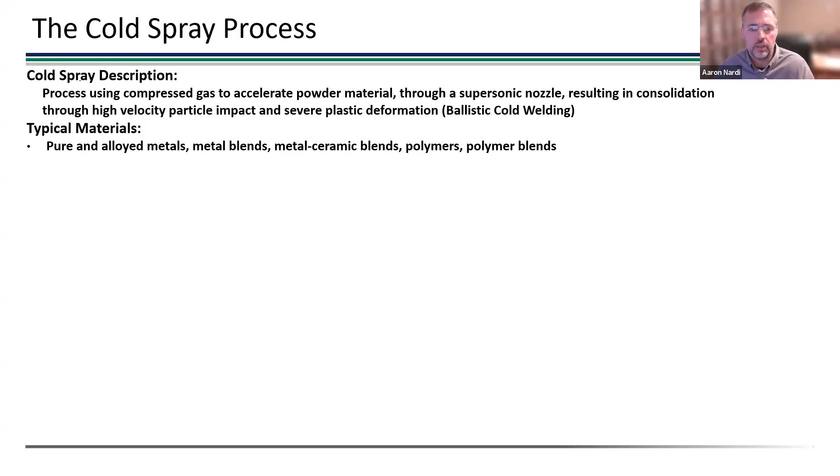Anything that can deform plastically can be cold sprayed. That's a differentiator from other thermal spray processes that deposit ceramics and similar materials, which is much more difficult to do with the cold spray process.

The systems typically consist of a control system, usually a gas heater—because we say cold, but what we mean is less than the melting point of the material. We have to feed the powder somehow, then mix the powder with the gas, and then it goes through the nozzle. When you do it right, you get a nice dense deposit.

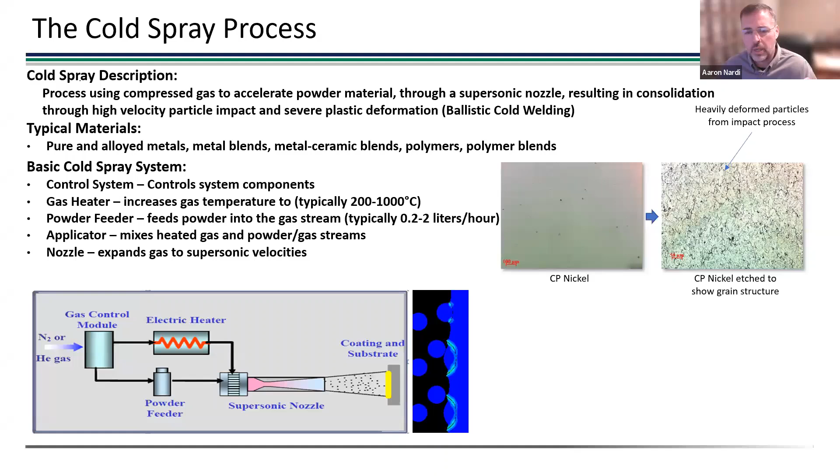This is an example of a nickel deposit. When you etch that, you can see the grain and powder structure in the material. It's very heavily deformed, with high levels of cold work. That's really how this process is differentiated from all the other thermal spray processes—it's the solid state nature of the process.

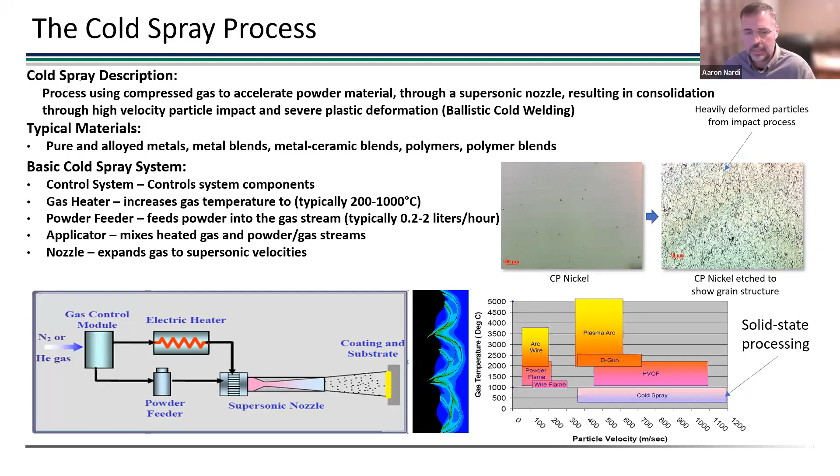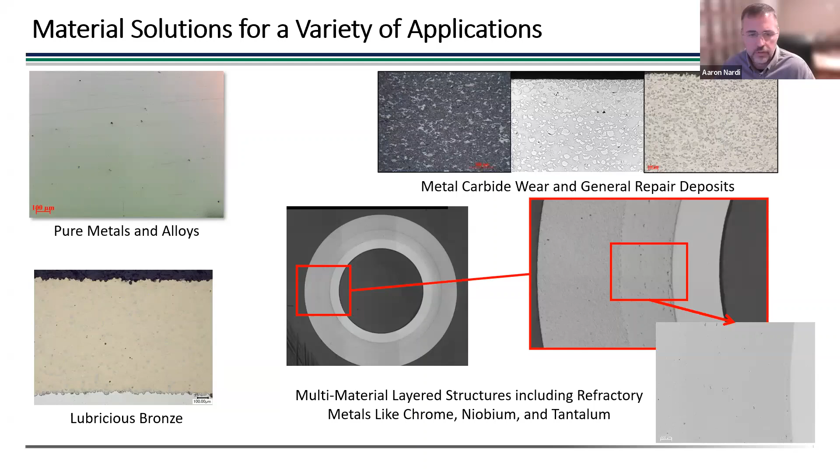There's a wide variety of materials you can process—metals and alloys, and blends. Metal carbide blends are really popular, especially for wear applications. Bronzes with wear phases or lubricious phases are also used. You can create all kinds of structures because you don't have to worry so much about melting and metallurgical incompatibilities. So you can put layered structures together that can be very complex. This is an example of a three-layer refractory material.

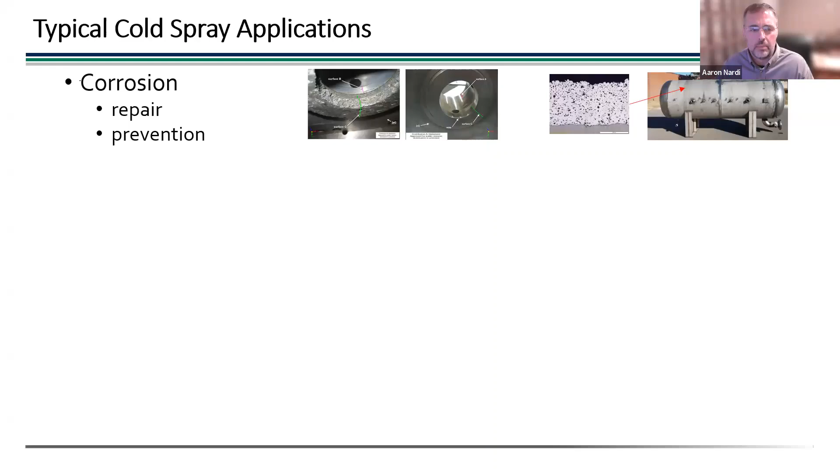So where do we use cold spray for corrosion? The industry is dominated by repair and prevention of corrosion, as well as repair and prevention of wear—those are the two dominant areas across a wide swath of the industry. However, there's also a lot of work done in other surface enhancements, whether thermal, inductive, conductivity, or even antimicrobial.

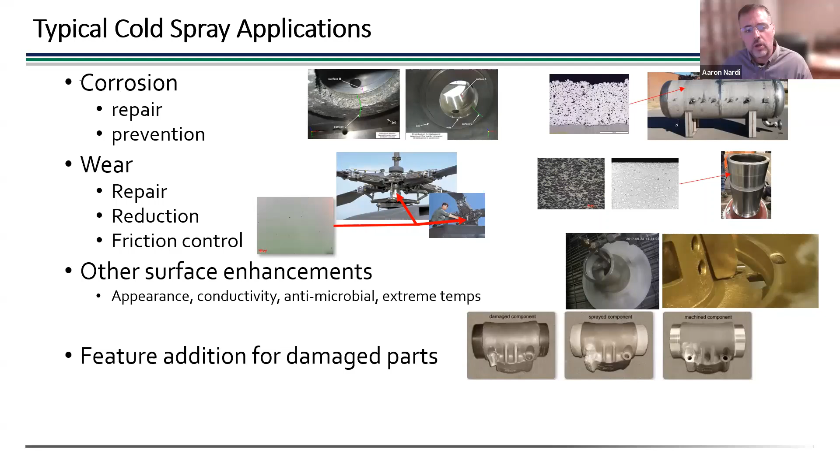When we're getting into these additive pieces, there are two ways we look at it. One is creation of very complex shapes on complex mandrels, which is a very good use of cold spray because it's excellent at putting down thin layers and building those layers to create a deposit. You can also use it just like a 3D printer and print on a flat plate, which is being done very widely today as well.

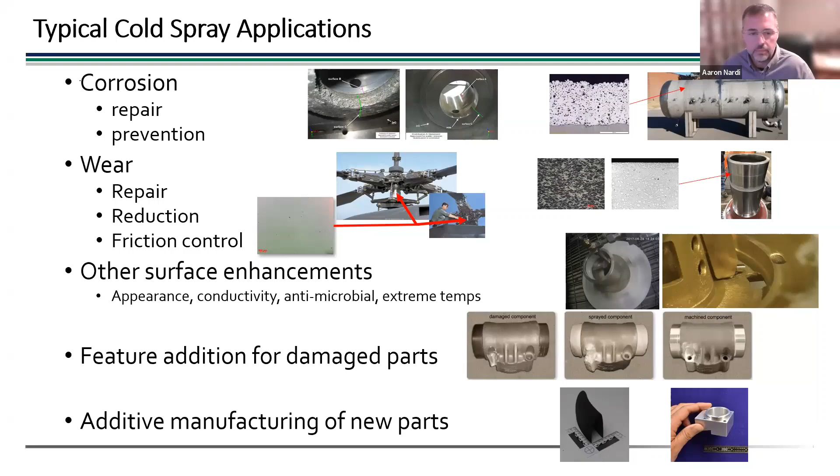VRC—kind of where we fit into things. We started as a company focused on high pressure cold spray. The idea was to take high pressure cold spray capability that already existed and scale it to put it into the hands of an operator. So we wanted hand-operated high pressure cold spray, and also something that could be portable. That's where the company started.

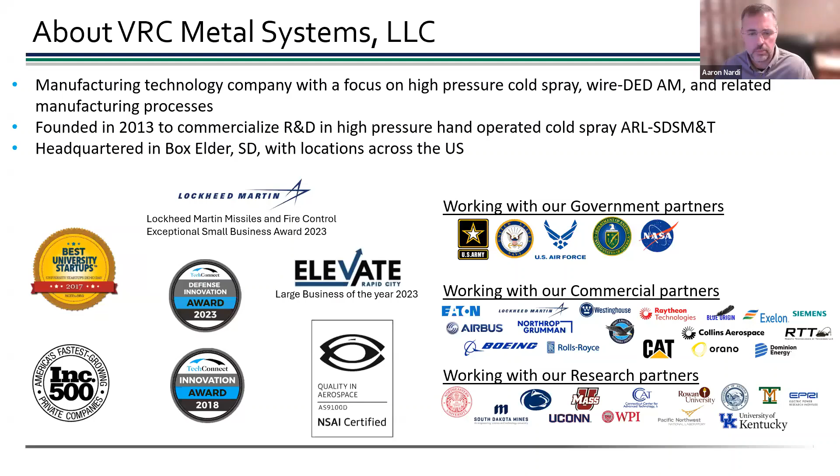Today we do almost every range of cold spray application, from factory use systems to very highly portable systems. We go into the field with systems, and we also do work in shop environments. We've received a lot of awards across multiple communities and different business sizes, and we work with a variety of customers across commercial, research, and government sectors.

If we look at the cold spray market as a whole, we can break it down into a few different segments. These are the areas we operate in—system engineering and manufacturing, which is fairly straightforward. But in order to use a cold spray system, you have to have a lot of other stuff—you need gases, and you need to be able to collect overspray dust in most places anyway.

So you need some sort of sound enclosure, or you need a lot of PPE on the operators to manage sound and things of that sort. So we do integration of our systems with automation and all of these booth configurations.

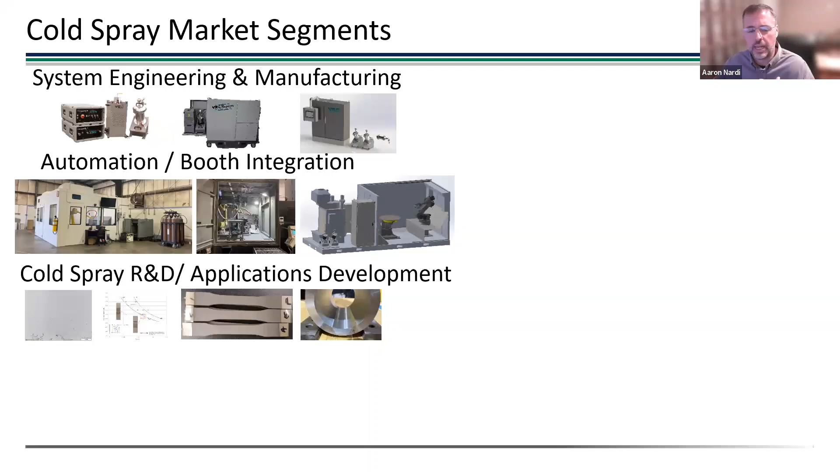We also do a lot of R&D and applications development for customers. This is where we're trying to develop specific materials or trying to deposit. You see an example there of titanium being put onto polymer substrates.

So unique applications that haven't been done already, we do those kind of developments for customers too. And then, of course, we sell consumables. So all of this is kind of, I would say, the system side - getting the customer what they need for doing their own cold spray work.

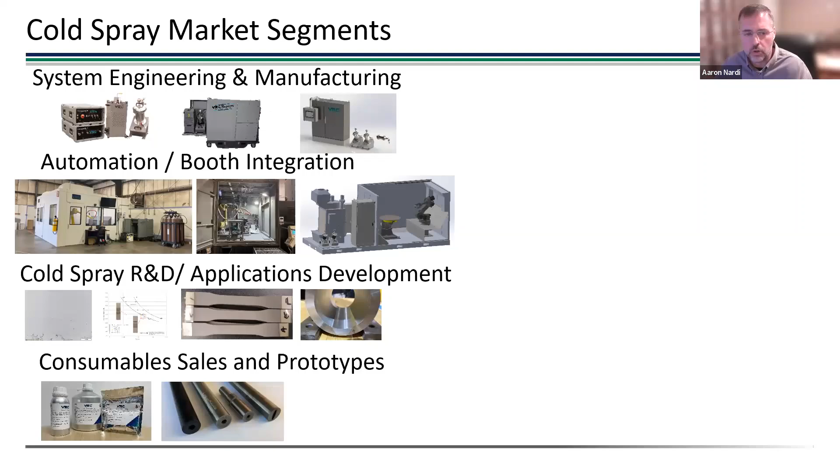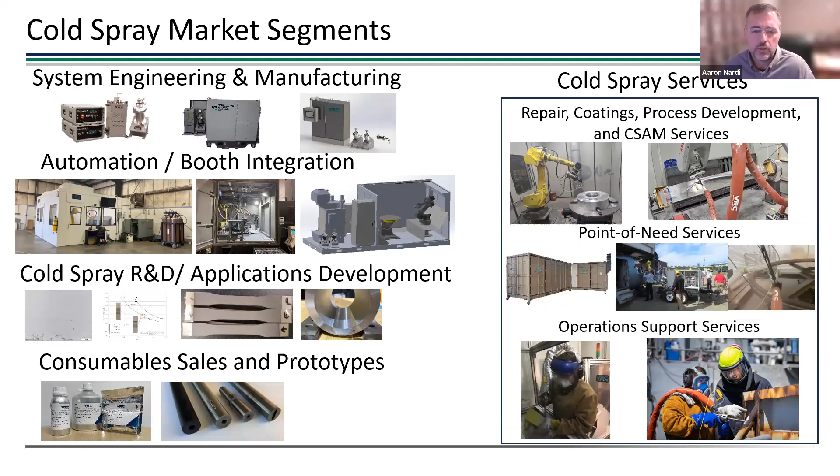We also, though, have a whole services side, and I'll talk a little more about this today. The repair services and coating services, as well as point of need services. So if we want to take that process to the field and actually repair really large parts that maybe can't be moved or something like that. And then we also work on operations support - I'll talk a little about that.

But first, let me just explain a couple differences in our pieces of equipment. So everything we do is high pressure. It's all high pressure cold spray. So you get that good high velocity, good density, and so forth. But we do put it in different packages.

So this package is a very highly portable system. It's meant to be able to go into the hatch of a submarine or some other kind of tight area. You can bring all of the components in by hand. And again, it does the full high temperature and high pressure and temperature application.

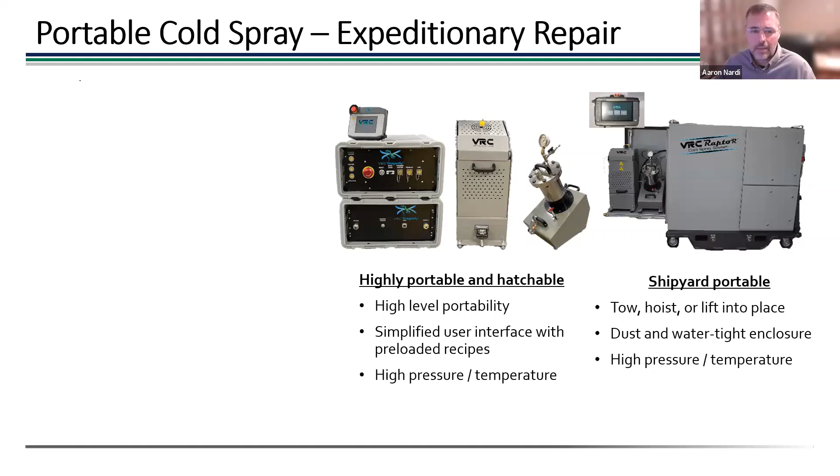Now we have our VRC Raptor - so that was the Dragonfly, this is the Raptor. We call it a shipyard portable system, but it's really meant to be either in a factory or in a shipyard where it needs to be rolled around from maybe one location to another. It does have hoist points on the top, and it's got a tow bar so you can tow it around with a vehicle. So it's a portable system, but it's not a hand portable system - it's to be carted around.

And again, both of these can be hand operated or robotically operated. They both have a similar temperature and pressure capability.

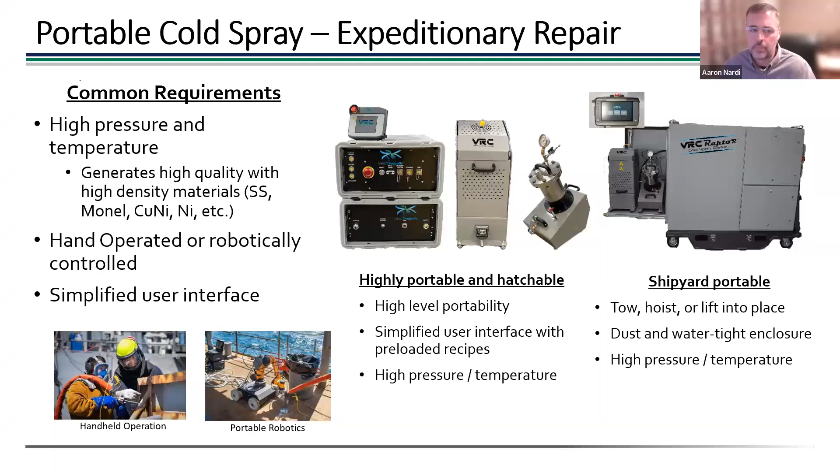Now we have our factory style system. I said the Raptor is often used in a factory setting, but this is really the system that's meant for factory use - it's called our Gen 4. This has a little higher temperature capability, also with very high pressure capability. And that gets us even higher velocities, which gets you increased plastic deformation, which, if you go back to what I said before, is really the key to cold spray.

So now we can deposit a variety of materials with very high quality - super alloys and carbides and all kinds of blends of material.

The difference also with this system is that you have water cooling on the nozzle, which does allow you to do a couple of materials that otherwise you couldn't do without fouling the nozzle. And then we also have 2 powder feeders standard with this system, so that means you can put one powder in one feeder and another powder in the other, and then blend the two of them together. Now if you want 3 or 4 powders blended together, we can go up to 4 powder feeders in our standard unit, and we can customize to go more than that as well.

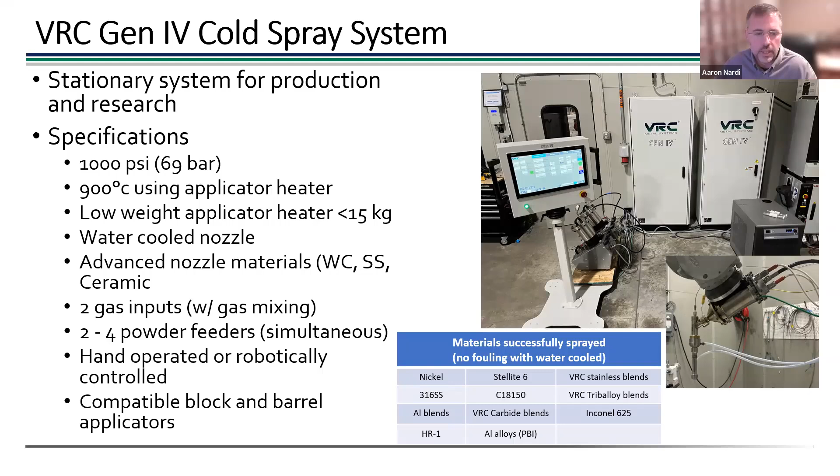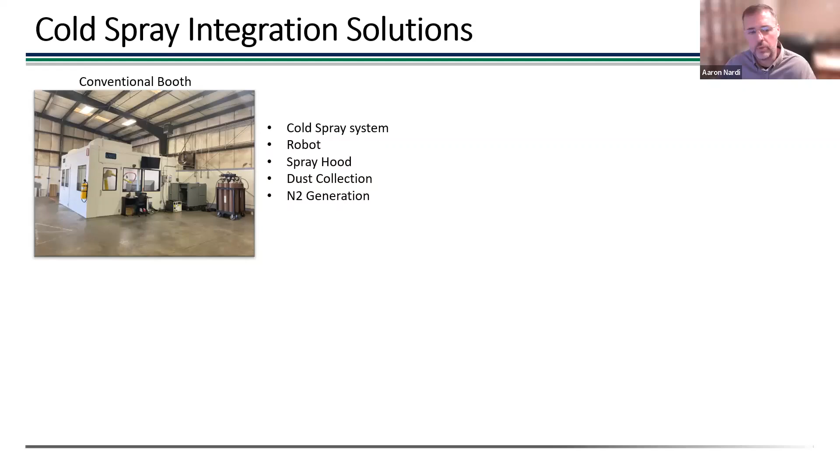All right, so typically integration solutions include, again, something like a spray booth for your sound enclosure, your robot, maybe a turntable. You need some kind of a spray hood with dust collection. And we also very commonly use nitrogen generation, and we kind of integrate all of these different systems into a facility.

Now, if you want to take it a step further, you can have all of that, but also add on things like machining capability that's coupled to your cold spray booth, or you can add in helium recovery if you are going to be doing a lot of helium work. So, I mean, those are all options as well that can be pulled into a manufacturing cell.

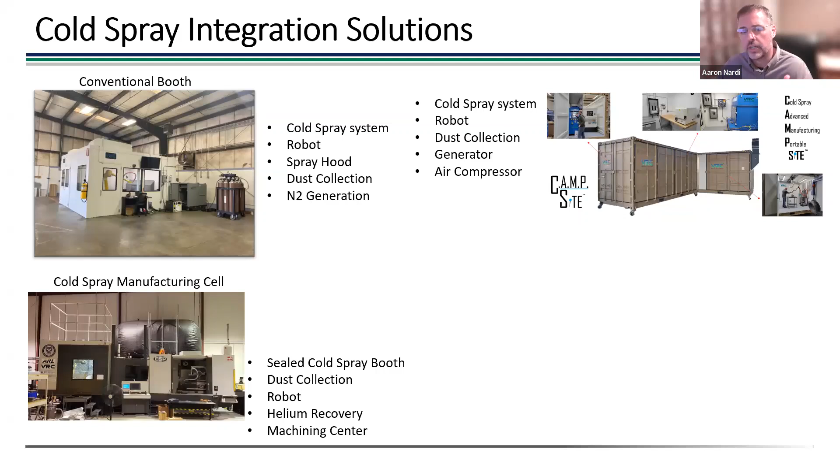And then you've got your portable solution. So if you want to integrate a portable solution for a desert environment or a shipyard, for instance, and you want a full capability booth and system but don't have a building to put it in, you can take something like this. It's a fully enclosed spray booth with its own generator and gas supply. It's got operator space, heating, and air conditioning for the operators. So you can put this at any facility or location and have a full cold spray capability at your fingertips.

Similar, but in a different form factor, we've got trailer-based systems. Same capability, but now put onto a trailer you can wheel around to a job site. You can pull a cart off that has your robot on it and bring that cart over to wherever you're doing your work.

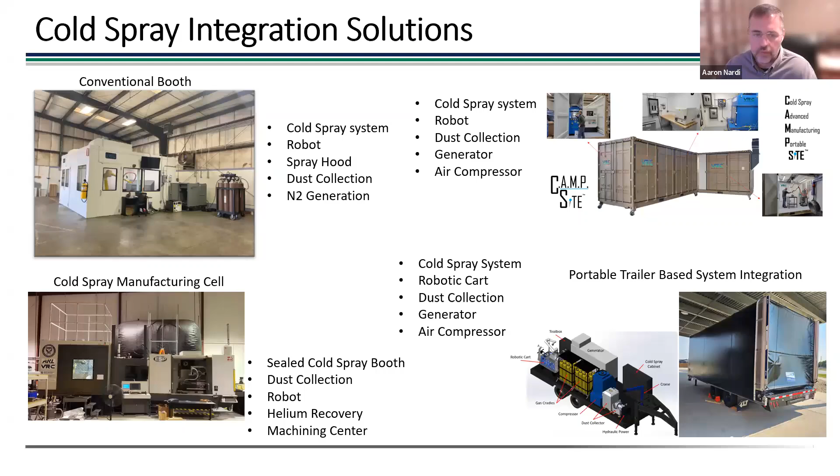So with that, that's kind of our equipment side - equipment integration and so forth. The bulk of that work is done at our headquarters facility in Box Elder, South Dakota, where we have systems engineering, systems production, and some process development and limited production.

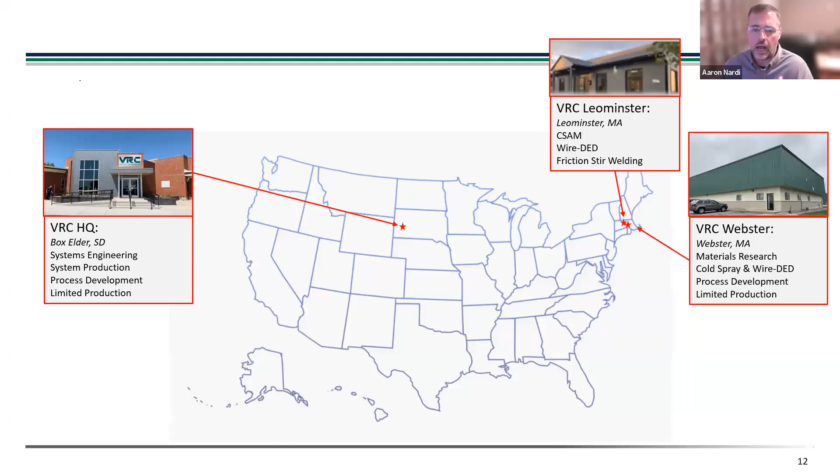We have two facilities close to Worcester where CSAT's going to be - one with Solvus at their Leominster facility, and the other in Webster, Massachusetts. Here we do material research and process research. We do a lot of government work on programs developing cold spray capability and also wire DED capability, and we do some limited production out of those facilities.

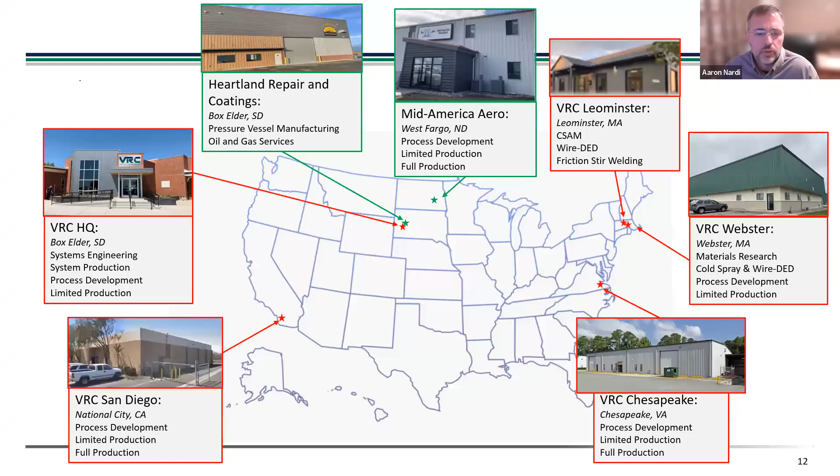We have full production facilities in both Chesapeake, Virginia, and San Diego - I'll talk a bit more about those. And then we have two subsidiaries who also do cold spray in a production environment: Mid-America Aerotech and Heartland Repair and Coatings. I'll talk a little about them as well.

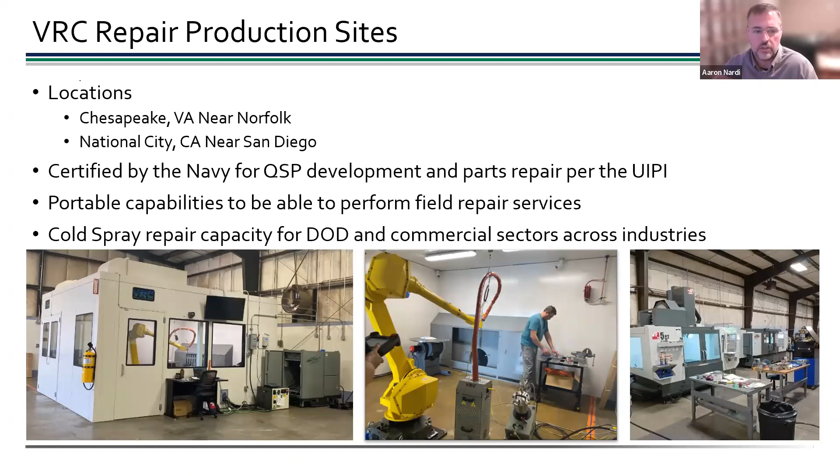First, the production facilities in San Diego and Virginia - both facilities are certified to do qualified spray procedure development for the Navy, so they're primarily focused on Navy activities. However, they also do a lot of work for other DoD and commercial sector industries. They have a lot of capability: full spray booth, qualification lab, machining capability, mills and lathes, and so forth. They also have equipment that can be taken portable to do field services locally, so we can lead off those facilities and do in-the-field repairs.

Mid-America Aerotech, this is in North Dakota. They have a full service MRO capability, so they do everything from machining and inspection to testing of all kinds - hydraulic, pneumatic, and so forth. But uniquely, they also do a lot of cold spray development and implement cold spray repairs into their MRO process. They're also doing work with electrospark deposition in service of their MRO clients, and they have full certifications to do FAA work and repairs in Europe as well.

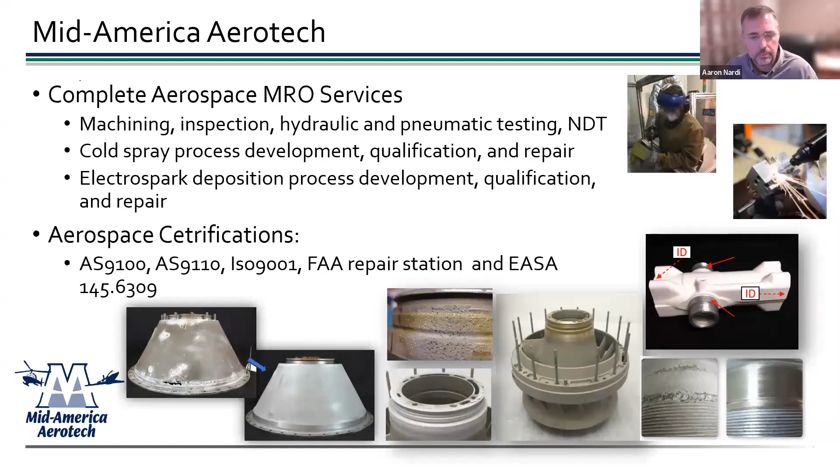Now, Heartland Repair and Coatings - they do a little different work, focusing more on the oil and gas sector and some heavy industrial sector. They do a lot of work with pressure vessel fabrication, structural fabrication of skids and pipe stands, and custom process piping for installations. Where cold spray fits in is they've developed a patented process for repairing gas and oil pipelines that have been eroded and worn over the years - they can go back in and add cold spray material to fill in the wear, then apply a composite wrap to certify that pipeline. They also do work with other pipe and vessel coatings for corrosion, wear, and so forth.

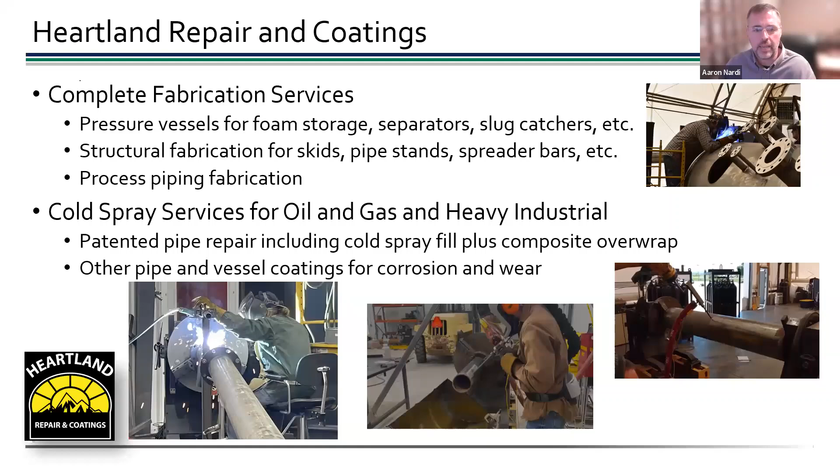So you've seen there's a lot of production capacity and capability, but there's still a lot of reasons why we might need to bring capability into your own four walls. One thing I like to stress is that cold spray is really easy to do - it's difficult to do well, though. For those of us who have been in the industry a while, things can pop up, and you learn a lot about masking, robotics, and all the extra things around cold spray that make it much more complicated to get it just right.

So to help people out, we do a lot of support training. We do a variety of different training, whether it be an extended period, like maybe 2-3 weeks or so. But we also do things like staggering the training - we'll come out and do the initial training, then go away and let the folks work with the equipment and work out some problems, then come back and do more training. That's helped quite a bit in getting people up to speed on how to use the systems and equipment.

Also very important to do calibrations regularly. We have an annual calibration schedule we work out with most of our customers to try to certify all the sensors that are in the system and verify that everything is running the way it should be.

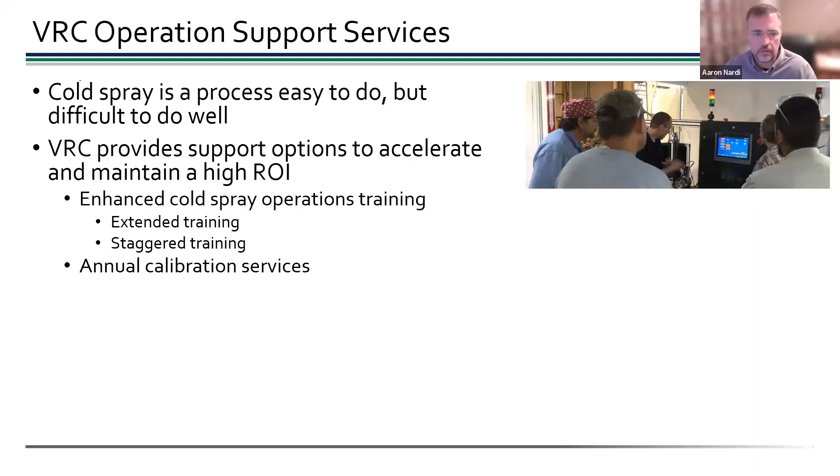You can go a step further, and we have a full PM of systems. So we'll actually go out on a periodic basis, usually once a quarter or something like that, and do full PM on the systems, replacing anything that needs to be replaced and so forth.

And with that, we also give reach back application support. So this is where a customer has a problem, they've identified an application or a potential application, but they just don't know the right material or the right way to develop the masking or whatever, and we'll work with them and develop that application with them so they can go and generate that ROI that they're looking for. Access to prototype hardware and so forth is a big benefit with that as well.

And then kind of at the full extreme end, we also put people on site at customers' facilities. So you get all of that PM application support, and you also get a person on site every day working hand in glove with the folks at the facility to develop those applications.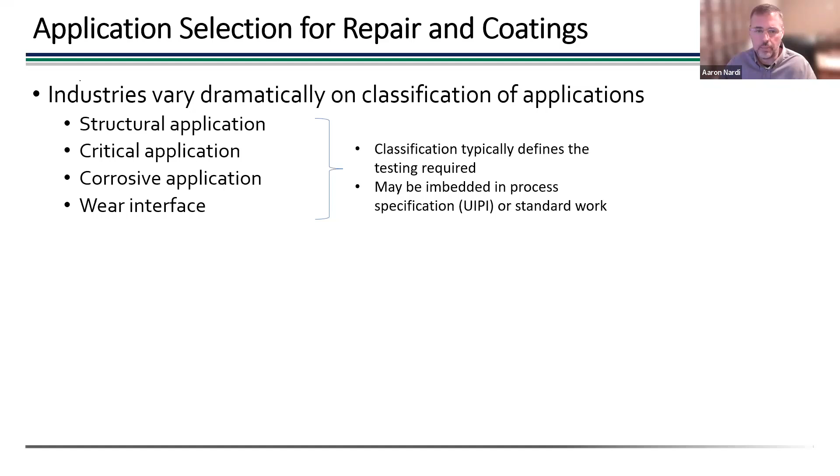And this classification typically defines what kind of testing is required. A lot of times that's embedded in some sort of a process specification. So if it's a commercial industry, it could be a material spec or a process spec that they have internally. The Navy uses something called the UIPI. I'll talk a little bit about that, or so forth.

Now we get to the material selection piece of it, and there's a lot of factors that might go into that material selection - mechanical requirements, physical requirements, and so forth. But also down the list sometimes is material cost. It does become pretty important, you'll see in some applications, or even just customer preference. Some customers are used to certain alloys, certain systems, and they want to use those for their repair.

Now, as you go through the qualification process, I'll talk a little bit more about that, but there's necessarily a lot of testing that gets done when you're qualifying an application. And one thing that's important to consider when you're setting up specifications and process plans and so forth is having a mechanism that allows for altered processes. So there's not many places that do this, but having a primary path for qualifying and a primary group of tests that need to get done to qualify an application, but then some subset of testing for requalification if you want to change something small.

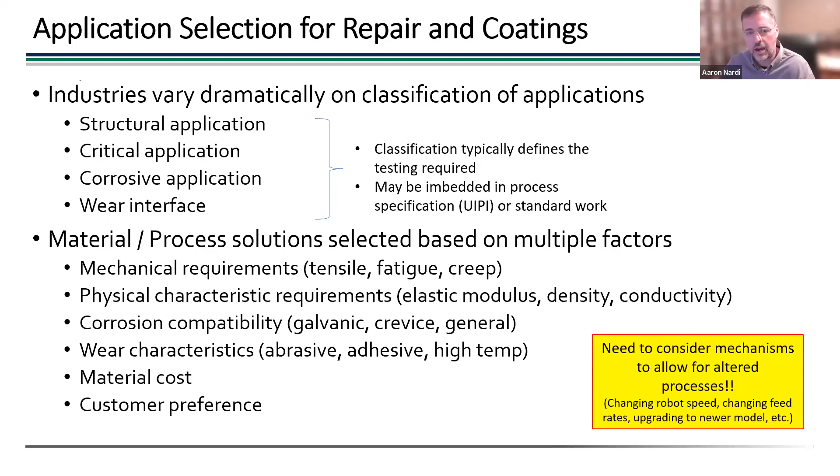Like say you decide I'm going to go from this geometry to this geometry. Now I got to change my robot speed. Well, all of a sudden, if your process was qualified with 200 millimeters per second and you want to go to 100, now you got to requalify everything. That gets to be very difficult. And changing feed rates is another one, and I'll show you an example of that. Or even upgrading to a new model of system, right? A new cold spray system or something like that. How do you prove that what you're doing here is the same as what you're doing there without going through a full requalification?

All right, so a lot of times what we talk about when we're trying to select an application is, especially if you're new to cold spray, where's the low-hanging fruit? What is that thing that's going to be easy to get, easy to implement, easy to qualify, and also give me a big ROI? Well, one of the first areas that people look at is high cost parts.

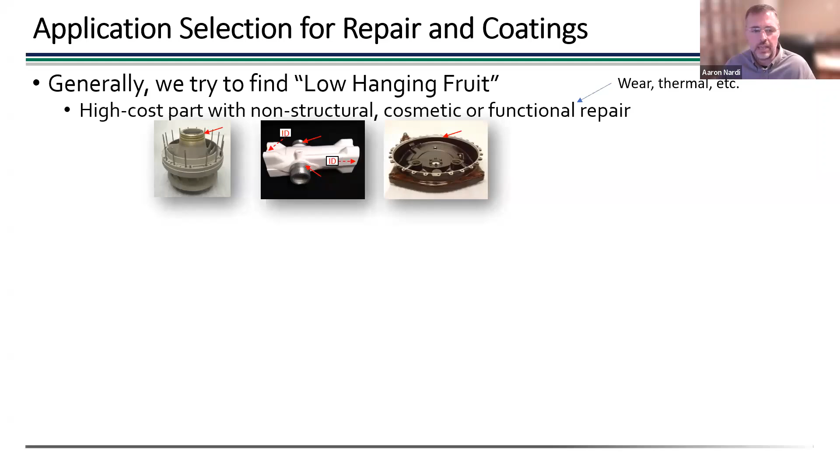And this, I'm showing aerospace examples, but this could be any industry. High cost parts that are non-structural, cosmetic, or maybe functional. Maybe they have a wear aspect to them, or they're a sealing surface or something like that. These are typically what people look at as lower hanging fruit because they may not have as many testing requirements.

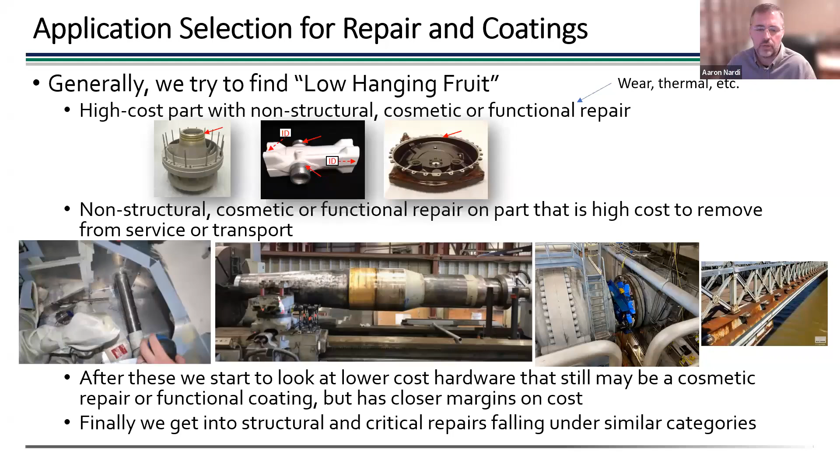So if you have something you can't move, how do you repair it without completely cutting it out and replacing it? After this, we start to get into costs and what kind of cost benefit you get out of a particular application, and then finally structural applications. This is the most difficult application typically because it requires a lot of testing.

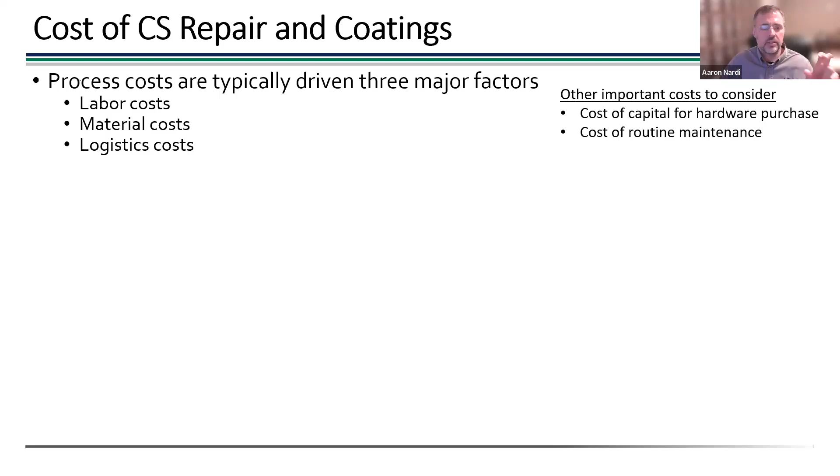So let's talk about cost for a second. If we look at your basic cold spray process, we can break down the major costs into three categories: labor, materials, and logistics. There are other important factors like capital cost and routine maintenance, but the bulk of the costs on a part-by-part basis fall into those first three categories.

Focusing on labor costs for a minute: how many parts are you doing at once? A 1-part lot versus a 10-part lot versus a 100-part lot—there's a big difference in your setup costs, fixturing costs, and so on. Is the geometry simple? Is there a lot of automation? What's the masking like? Are you repairing it at the point of need, or in a factory? All these things play a role in labor costs.

Material costs come down to the actual cost of the material, the deposition efficiency of the material, and how big the area is that you're repairing. Then there's the gas—if you're doing helium, that's obviously an important factor, nitrogen a little less so. And then there's logistics costs: shipping parts, shipping people to the parts, all that kind of stuff.

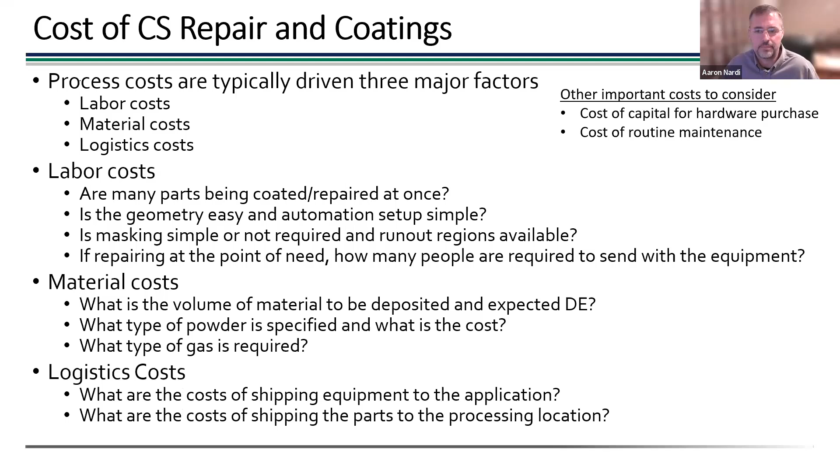So let's look at a simple case study. If we take a high value magnesium part—say it's got a surface 24 inches in diameter, about half an inch in height, and we want to put 50 thousandths of an inch of material down. Let's say this part costs $100,000. I've got the cost of helium, nitrogen, a helium sprayed aluminum powder, a nitrogen sprayed aluminum powder, and the relative deposition efficiencies of each. All those assumptions are here.

So we start to look at what the most basic cost would be—I'm not even getting into profit margins or anything like that, this is just your base cost, so your real costs are even higher than this. But if we just look at that base cost, you've got about $4,000 to repair this part, using pretty typical numbers for a helium sprayed version—a standard helium process of 6061 spraying 6061. That's still only 4% of the cost of the part, so it's still a big value to the customer, but it is $4,000 to repair that part.

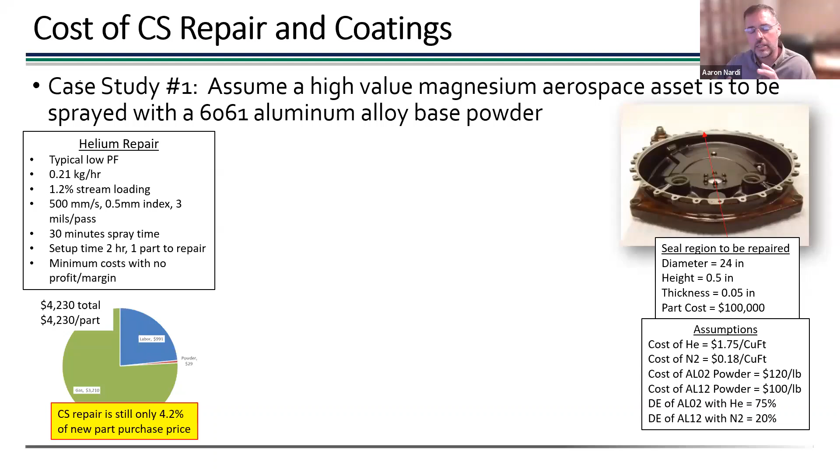If you did some modifications to that process—and this is where it becomes important to have that mechanism to change your process around—you can increase your feed rate and increase your velocity so that you still get the same thickness per pass. Now you're getting down to about 6 minutes of spray time instead of 30 minutes.

And all of a sudden your per-part cost goes down to $700, $800, right? But that also includes more parts in a lot. I assumed a 10-part lot here as opposed to a 1-part lot for the first case.

So basically increasing the powder feed rate and then increasing the number of parts you spray gets you to this significantly lower cost. Now you can go a step further and go to nitrogen, but now your increment is much smaller, right? You're going from $800 to $400. It's still an improvement, and it could be very important, especially if there's difficult logistics in getting helium.

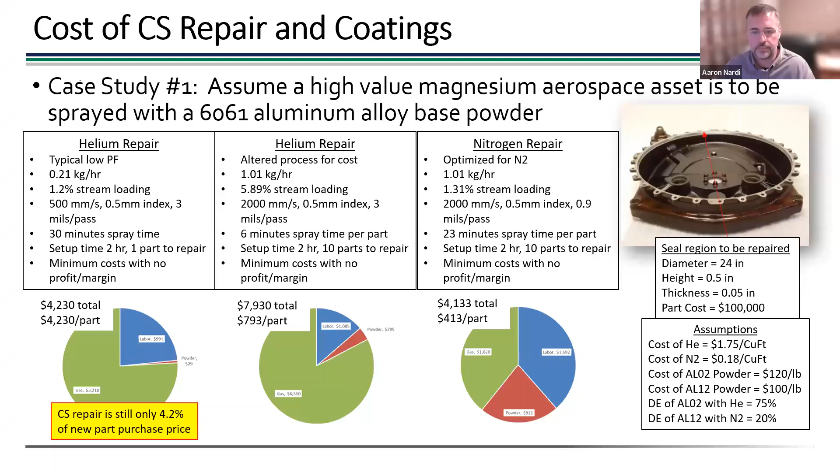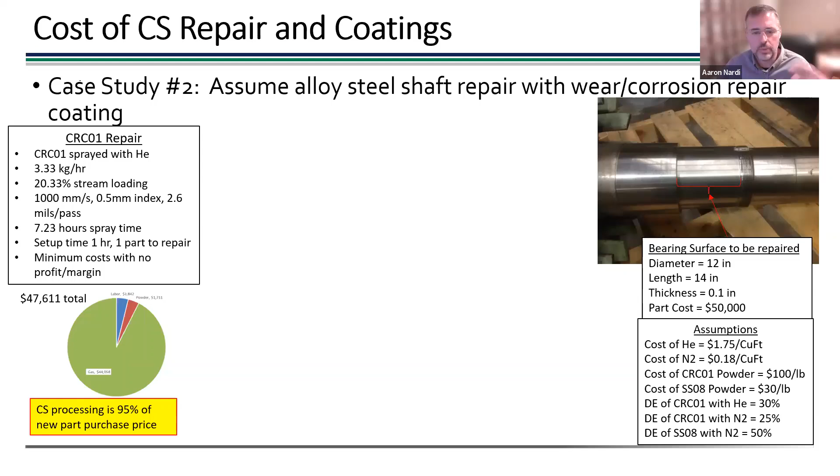Now, if you start to look at a helium repair with this material, this is CRC01, a chrome carbide nickel material used very commonly to repair steel parts like this. Even with a pretty high stream loading, not incredibly high but pretty high, it's still going to take 7 hours to put that material down. So your cost of doing this job with helium would almost be as much as the whole part cost. So you really can't do that.

But if you now switch over to nitrogen, even assuming only one part here, still one part lot, you bring that total cost down to about 12,000, and now you see the large bulk of that cost is in your powder. The green is your gas, the red is your powder, the blue is your labor. You can see the bulk of it is now the powder.

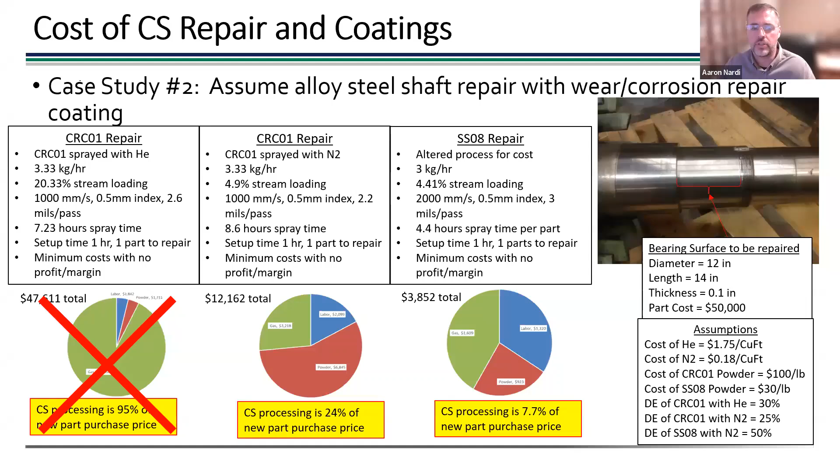If you go a step further and select a powder that's a lower cost material, now you can bring that cost down even further to just under $4,000. And now you've got an even distribution of your gas, labor, and powder costs. So that's really just a couple examples of how different assumptions and different paths to a solution can make really large differences in the cost of a job.

All right, I'm going to jump over to qualification procedures, and the first one I'm going to focus on is NAVSEA. They've done a really good job of creating this UIPI system, which allows them, at the shipyard level, to qualify their own repairs across platforms. So across the ships they service, they're able to use this UIPI to dictate whether they can do a repair or not and how to qualify that. As long as you stay within the guardrails of what this UIPI allows, you're able to qualify your own repairs locally.

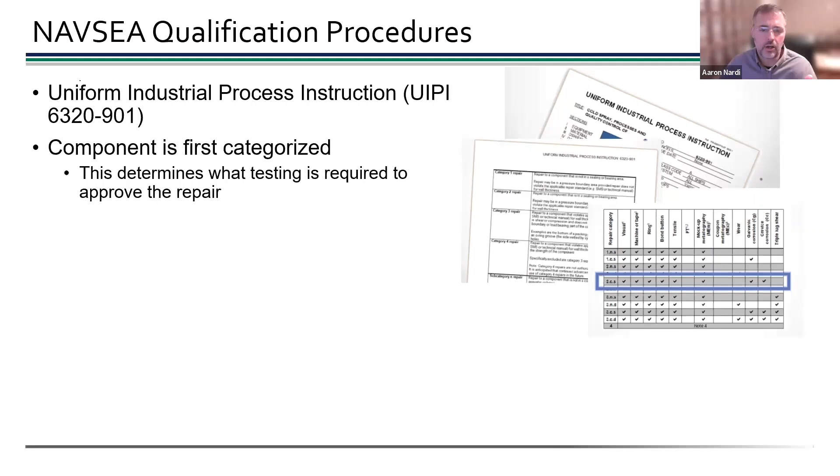This is kind of unique amongst the DoD because it's got that cross-platform capability. So the way this works, like everybody else, you qualify what category of part it is, whether it's structural, wear, corrosion, whatever. You identify the tests you're going to do, you pull up the ASTM standards, and you run it per the standard or per the UIPI itself, depending on the test you're running. Then when you're done, all that data goes back to the shipyard, they sign it off, and this QSP goes into the Appendix A of the UIPI.

It's a pretty straightforward process. We've done it a bunch of times with our repair sites, with our production sites. Works quite well.

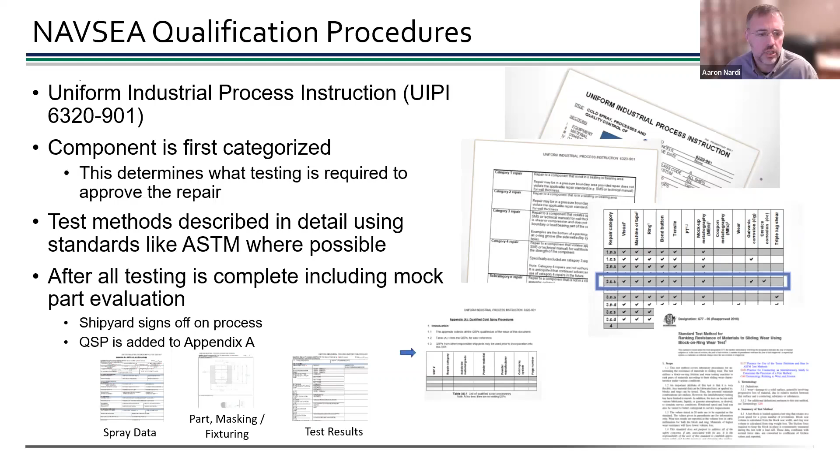They just released recently a tech pub. Now, this is a similar document to the UIPI, but it actually allows a similar application of the technology at the commercial shipyards, as long as they're doing Navy work at those commercial shipyards. So they have this process to allow them to do that there.

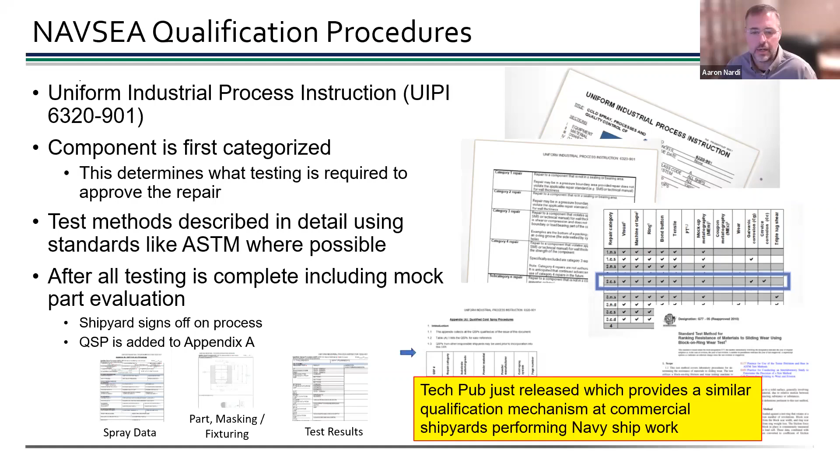Next, I'll just talk quickly about DoD aerospace. Really, a lot of what you're going to see from here on is that every platform and every part needs to be approved, right? Even non-structural, non-critical applications require approval part by part, pretty much across the board, with a few exceptions.

And this includes the program offices as well as airworthiness. They may reside at different locations, but all these folks typically need to sign off on every repair.

The Air Force is a little unique. At the wing level, they actually require every single part, every single not just part number but serial number, to be signed off, because they're also trying to maintain traceability of which parts have been repaired and which haven't. At the depot level, it's a little broader because they have all the paperwork in place there for the repair of the part, so they're allowed to execute that repair on that part number whenever needed.

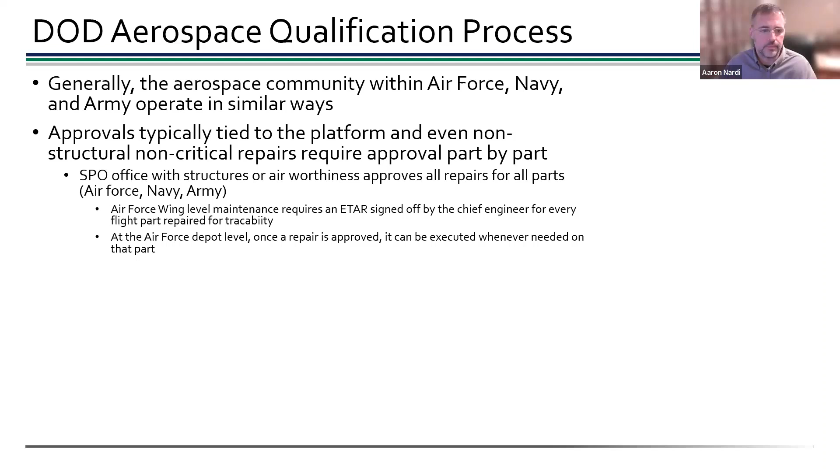At the Army, they have a slight exception as well. They have certain cases where they have blanket approvals for certain categories of parts. So magnesium repair is one of those for non-structural applications, and that got a lot of MEOs issued early on the Army side.

Structural repairs, like I said before, are pretty rare still. There's a few out there, but they require a lot of detailed testing typically, and sometimes full component level testing, and that gets very difficult to do. So there's not as many of those around.

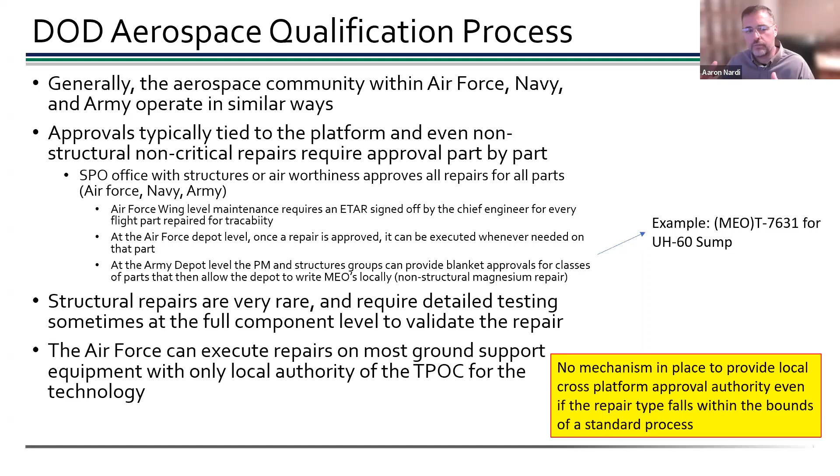Interestingly, the Air Force can execute repairs on any other ground vehicles with just the local TPOC signing off on it. So that's kind of an interesting carve out on the Air Force side. There's really no mechanism in place for cross-platform approval authority, so like the UIPI that the Navy has, there's not really that same mechanism that allows local approval for a category of parts, with that Army exception, of course.

All right, Army ground-based systems. This is really, I don't want to say ad hoc, but it's a little different when you go from one PM to another PM because of the way that different platforms operate. But it is still a part by part and a platform by platform approval. Some PMs really rely more on the OEM to do the approval, and some do more of a local or Army approval for that.

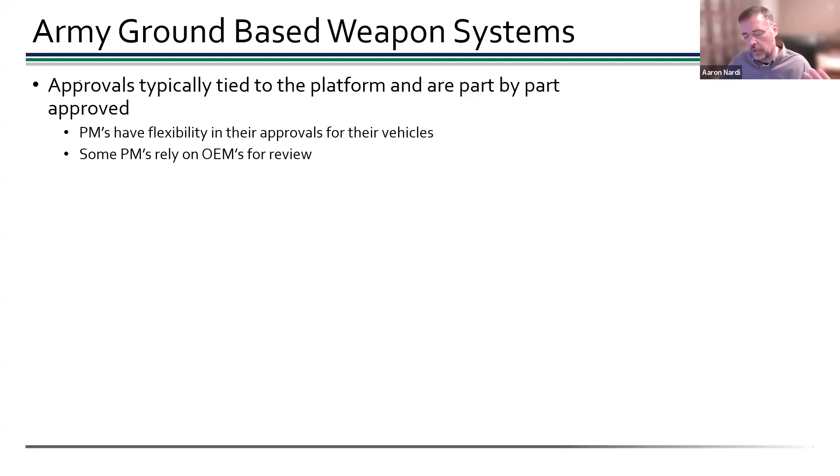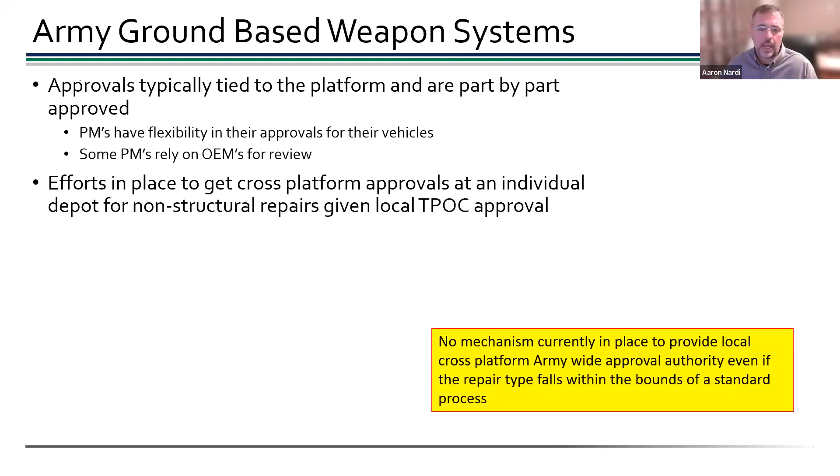And there are some efforts in place to try to get cross-platform approvals, at least at the individual depot level. So a particular depot might be able to get approvals to do a category of repairs. There's not really a mechanism in place, though, still for cross-platform and Army-wide approval authority there.

Now, commercial aerospace, I mean, it's pretty straightforward. They have processes in place. The OEMs have repairs that they implement all the time. They have to go to the FAA or the DoD to get those approved, but those are very robust processes. They do them all the time for a wide variety of repairs. And those approvals are pretty straightforward because the OEM is typically the design authority for those.

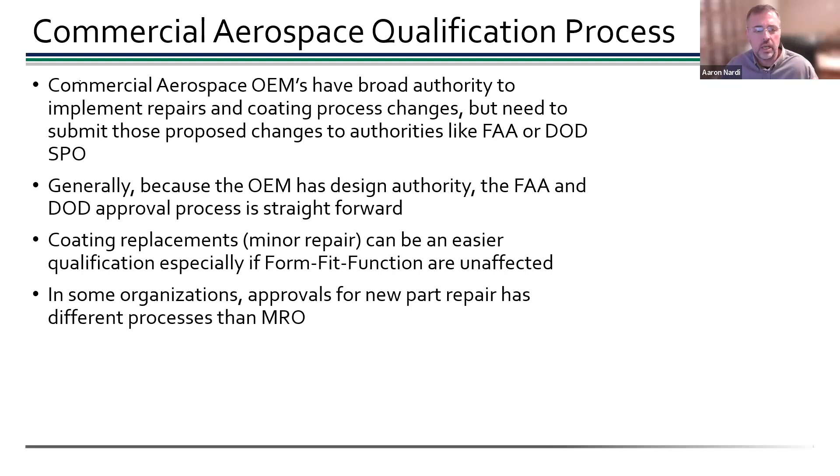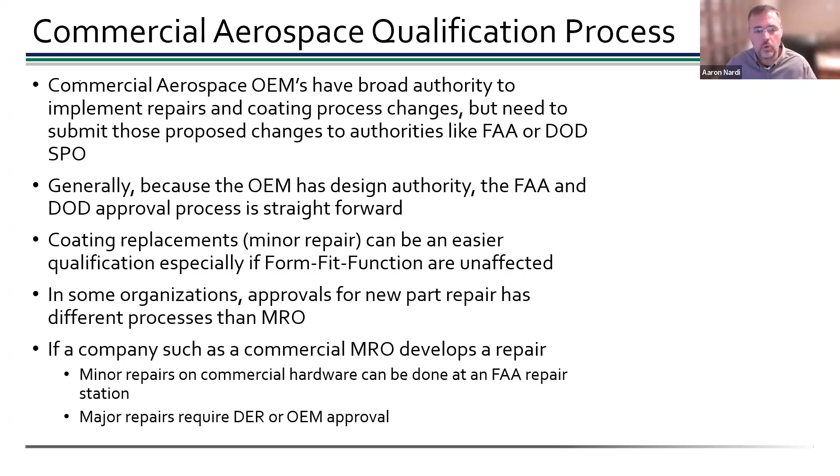Coating replacements are typically minor repairs, form, fit, function. Organizations like MROs, for instance, can do those types of minor repairs just with an FAA repair station certificate. Major repairs, though, still have to either go back to the OEM or get DER approvals.

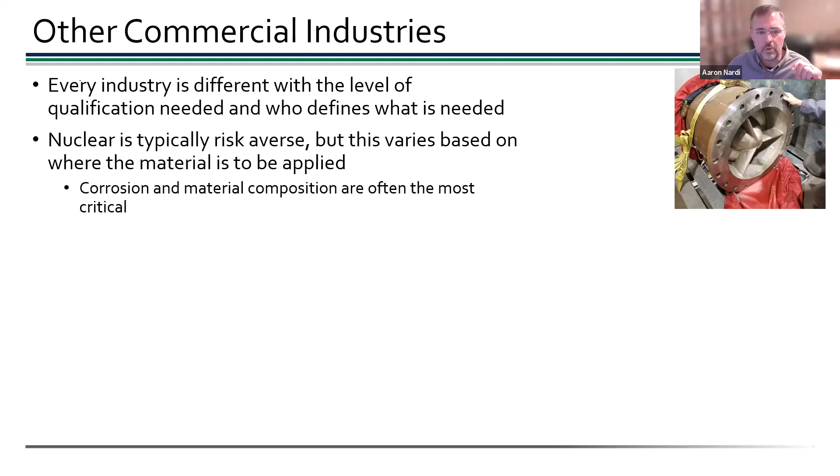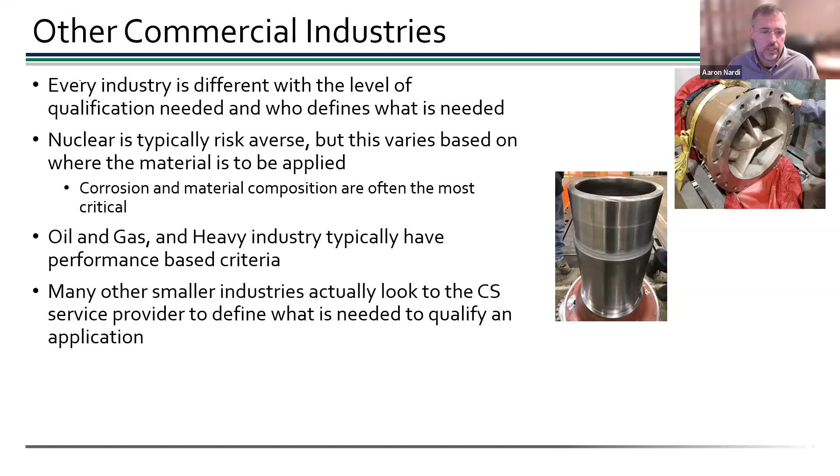And then I guess the last one I wanted to focus on is other kind of commercial industries. They vary quite a bit, I should say. But the nuclear industry, they may be risk averse, but they do have a lot of applications. Corrosion and material composition are typically what they care about. Oil and gas, heavy industry, they're usually performance-based, and a wide variety of other industries really define what they need to qualify, sometimes based on what the cold spray service provider suggests. So having those internal processes at the service provider level is really important to meet those customer needs.

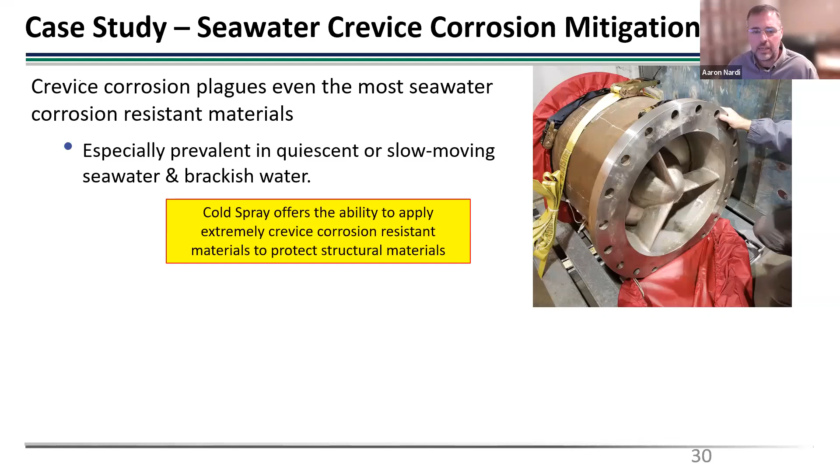So last thing I want to talk about is just a couple of applications. This is an application we've been doing for many years now. It's a crevice corrosion problem. And here we have a very corrosion resistant substrate, but we're adding an even more corrosion resistant coating because they do have this crevice problem at the flange. This is what it looks like. They have these corrosion pits that form at defects in the casting.

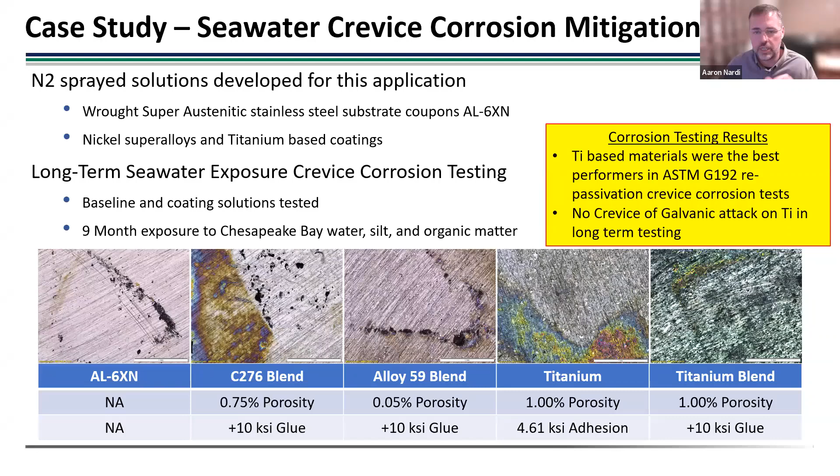We've looked at titanium and nickel-based solutions and have done a wide variety of corrosion testing. And really, it comes down to titanium being a very good corrosion-resistant material for these applications. So titanium is really the gold standard here in these crevice applications, and that's what we've done. We've developed the whole process around this, and as I said, we've been doing these since about 2020. We've done quite a few, and we've even done them just a month ago or so.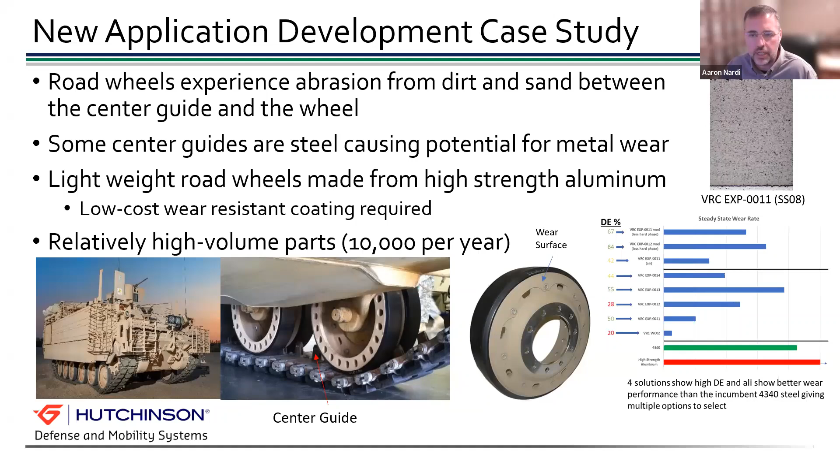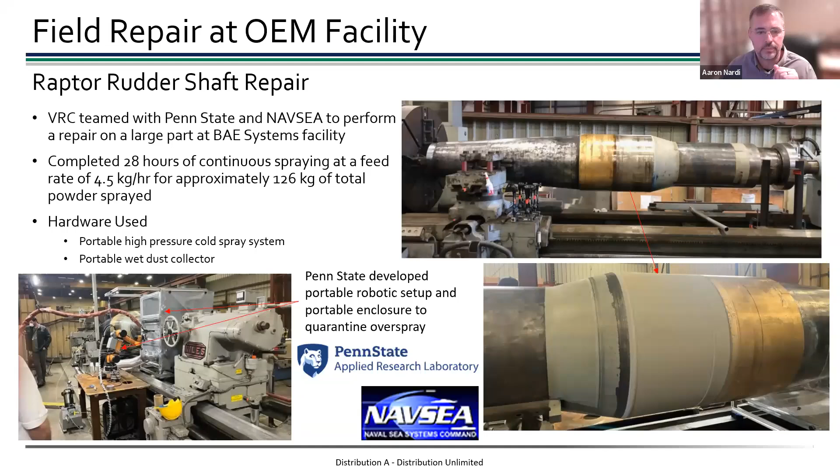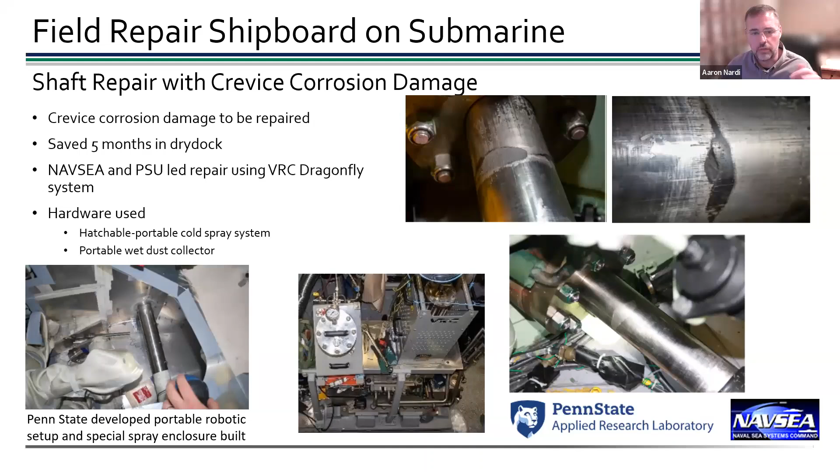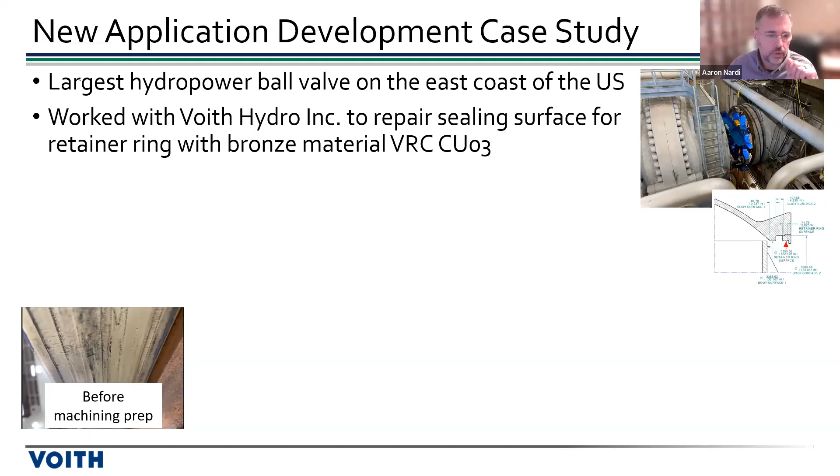And this is a part we did just recently. This is a hydropower application—like the largest ball valve on the East Coast. It's gigantic, and removing this thing from service was going to be very difficult. Moving it physically to another location was just out of the question. So we brought our equipment to a facility where we were able to set up a makeshift area to actually do this coating. Before the coating, here's an image of the surface.

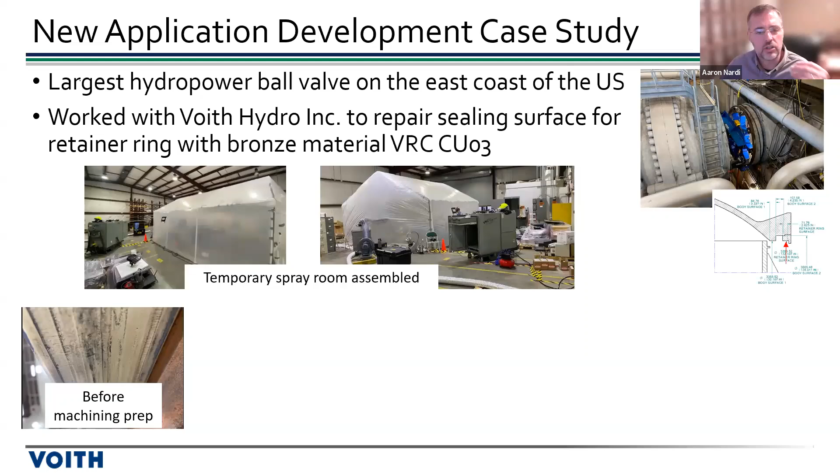You can see here we set up a little temporary spray room where we did the work. We have all of our dust collection, our cold spray system, and so forth. Inside of that, we have a manipulator to rotate this big ring. We were able to spray a coating on the inside of this ring and build up a little over 1/8 of an inch, and then they were able to go back and machine that and finish it up.

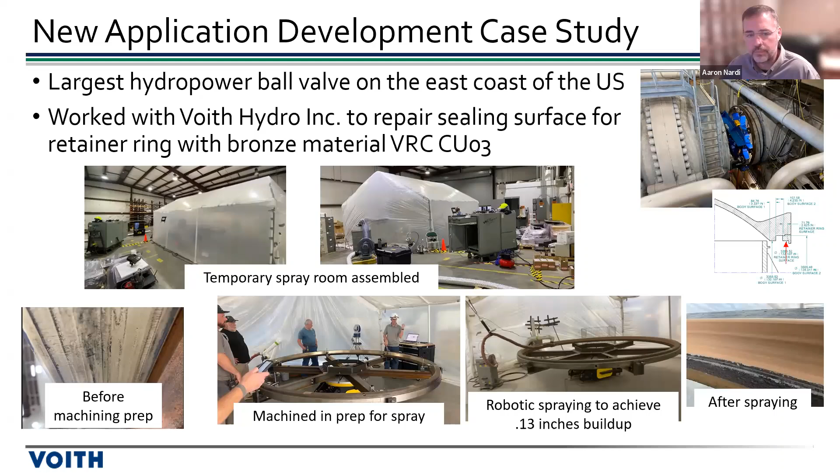So with that, hope I didn't go too far over my time here, but happy to answer any questions that popped up during the talk.

Awesome. Thank you, Aaron. You covered all of my favorite things in cold spray, including a lot of the key points that so often we miss, which is really about those decision criteria and where we can really use cold spray and how we can think about it. So I'm curious, as you think about the customer journey in some of these applications, where do you find the best ways to actually help folks see what those opportunities are? How do they really work with you guys to get from this idea phase to here's a real application that we can add real value for the customers? What's that journey like for you guys, and how do you bring folks on that journey with you?

Sure. So it's pretty rare that a customer, especially one new to cold spray, is able to come in with a fully formulated idea of what they want to do, put it on the table, and have us just quote it and do the work. That's pretty rare. Most of the time, we first get on the phone with the customer and talk through what the problem is, what they're really trying to solve. They might have an idea of what they want to do, but after discussions, we say there's a few different ways you could attack this. If you could have a little allowance here or there, we might not need extra masking, we might not need special equipment, we might be able to get into this area easier, and so forth. And of course, my background is heavy in materials, so I always like to focus on that side and try to figure out what I can do with a particular material that'll make their life easier or give them longer life or whatever.